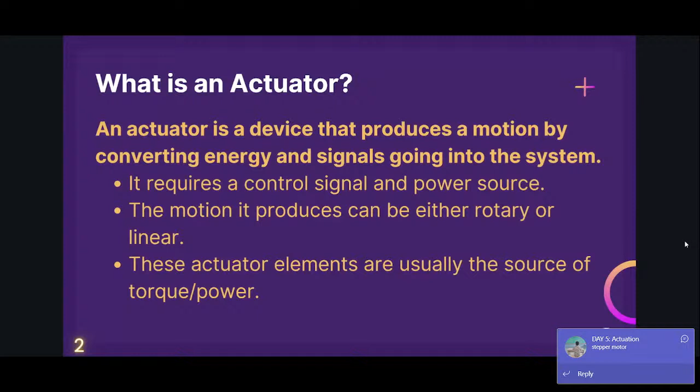Yes, motors. Motors are like stepper motor. Yeah, stepper motor, servo motor. The motor is a very good example for an actuator. Yes, exactly. So it requires a control signal and a power source. The motion that an actuator produces can either be rotary or linear motion. So we'll learn this as we learn about the types of actuators. And these actuator elements are usually the source of torque or power.

Okay. So actuators that you find in daily life. So what can it be? Okay. So if you have traveled in public buses, there is an actuator there. You'll find that there is a motor linked to the door of the bus for closing and opening, right? So that motor has a rod connected to it, to one side of the door of the bus.

So that actuation there is a good example for linear actuator. It opens the door, it closes the door with a linear motion. So that's basically a good introduction to actuator. So can we go to the next slide, please?

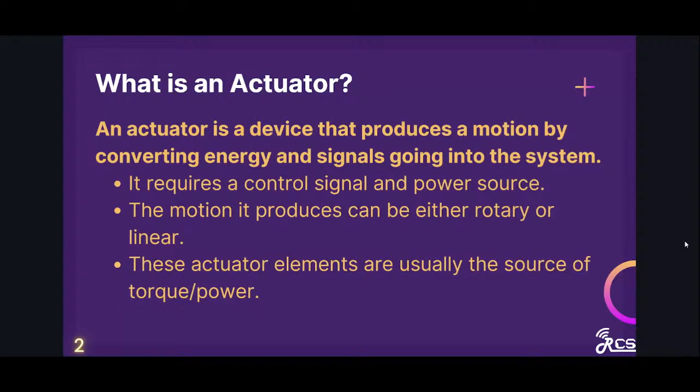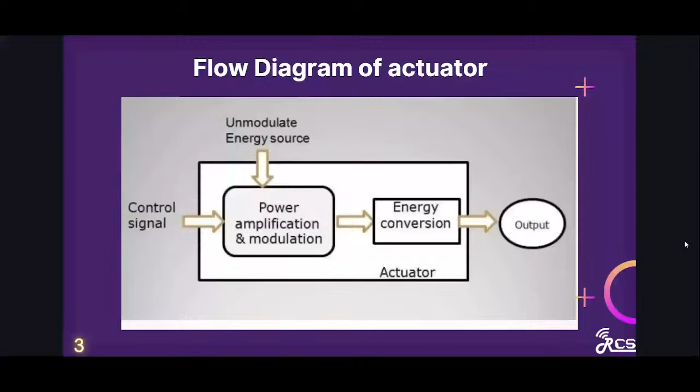That's correct. So the other category on which you would decide an actuator is based on the output, whether you want the output to be in a linear mechanical motion or do you want it to be in a rotatory motion. So yeah, that's what we're going to see in the next slide.

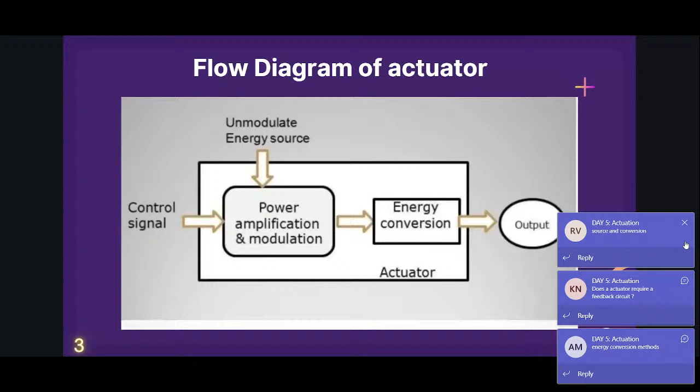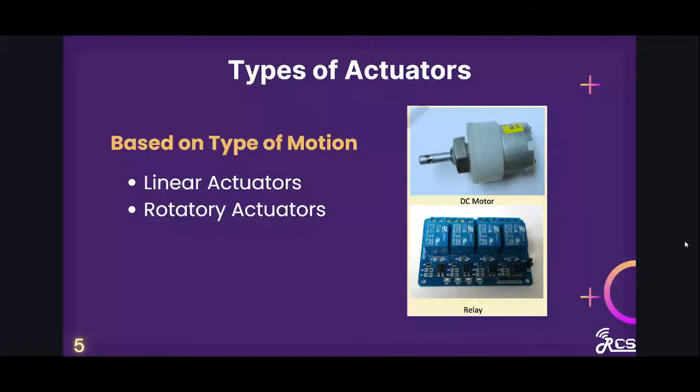Next, we have based on the type of motion. That is, whether we want the actuator to give a linear motion or do we want the output motion to be rotatory in nature. So now that you have seen what all types there can be, let's go right into our first type, which is pneumatic actuators. So pneumatic actuators are devices that convert the energy of compressed air or gas into mechanical motion.

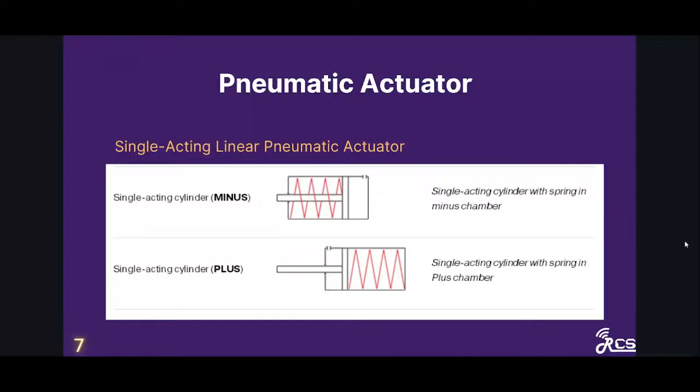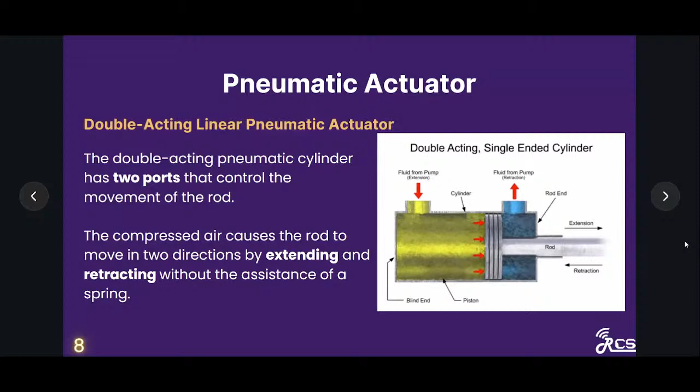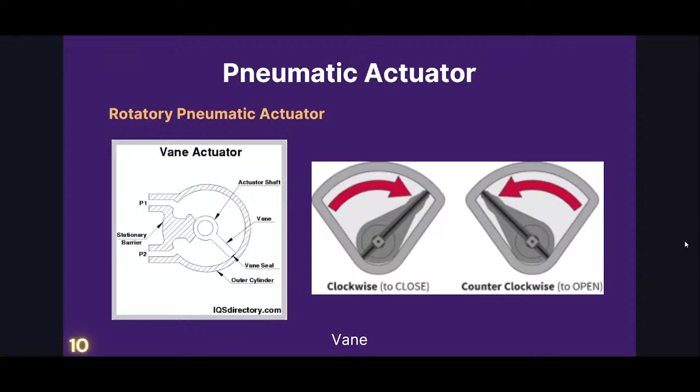Any doubts before we move on to the next topic? Yeah, Avantika, in vane you can move it both ways. If the pressure in P1 is more than P2, it moves clockwise. And if the pressure in P2 is more than P1, it moves counterclockwise. So in both mechanisms, you can move it clockwise or counterclockwise. Okay, so if you don't have any doubts, let's move on to the next topic.

Hydraulic actuators. Hydraulic actuators are very similar to pneumatic actuators. The only difference is that in hydraulic actuators, you have a liquid present. That liquid can be water. It can be any chemically synthesized liquid based on how much PSI you want to work it under. Whereas in pneumatic, you'll be using compressed air.

So yeah, in this also you have the same types: single acting, double acting, rotatory, everything is similar. The only difference will be that you have a liquid present and not a gas present in that chamber. But wait, before I start semi-rotatory actuators, if all the mechanisms in hydraulic actuators and pneumatic actuators are the same, that is, we have the same rack and pinion, same vane, and same single acting and double acting, why would we choose hydraulic over pneumatic, or pneumatic over hydraulic? What advantages do you think both of them have?

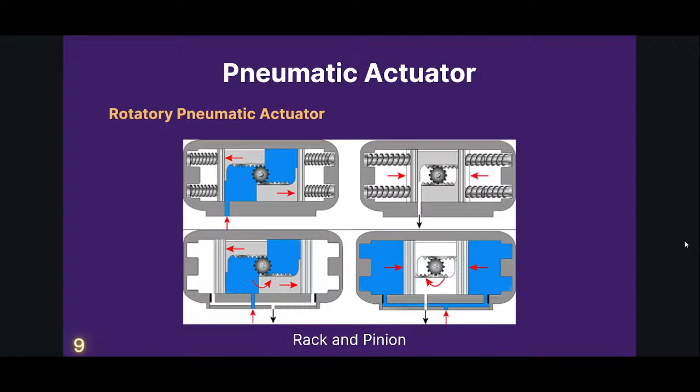If you look at the characteristics of pneumatic actuators, which I told you at the start of the concept, these three characteristics, you can get a clue of why we would choose one over the other. Any clues? Okay, yeah, definitely there is minimal leakage in pneumatic actuators because gases tend to leak much less than liquids. So that's their minimal leakage. Power will be more in hydraulic. Yeah, that's true. Why do you think the power will be more?

Actually, I won't say the power output would be more, but the power which you get for a certain energy input. That is, let's say you send 50 meter cube of liquid over here, and you send 50 meter cube of air over here; for the same input amount you will have a different power output. But yeah, that is true. Power will be more for the same input. But why do you think that is so?

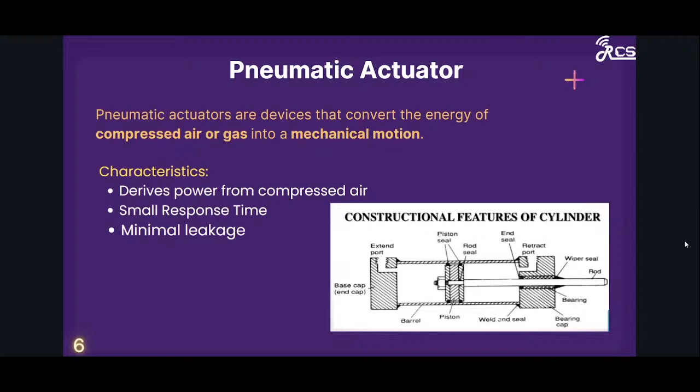Any clues? That point over there, that power will be more in hydraulic, is the main reason why we use hydraulic over pneumatic in certain situations. But why do you think it will be so? Any guesses? Okay, I'll tell you why. So, in hydraulic actuators, whatever liquid you send, it's less compressible than whatever gas you send, because gases are always more compressible than liquids. Yeah, due to incompressibility. Yeah, that's true.

So suppose you send certain energy for air and certain energy for liquid. What will happen in the case of pneumatic actuators is that a certain amount of energy will be spent to compress the gas inside. Whereas in hydraulic, it's not that compressible for normal use; at high pressure it's definitely compressible, but for the normal pressures we use in industries, it's not. So for the same energy you'll get more power there.

Hydraulic could sustain the power provided for a long time. Yeah, that is also true, because suppose you send a constant amount of pressure for a long time, that energy will compress the gas after a certain time. So let's say you have the limbs of a robot, a bipedal robot, and you control the limbs using hydraulic actuators. Let's say you want to pick something, and you want your arms to be at that position for a certain amount of time.

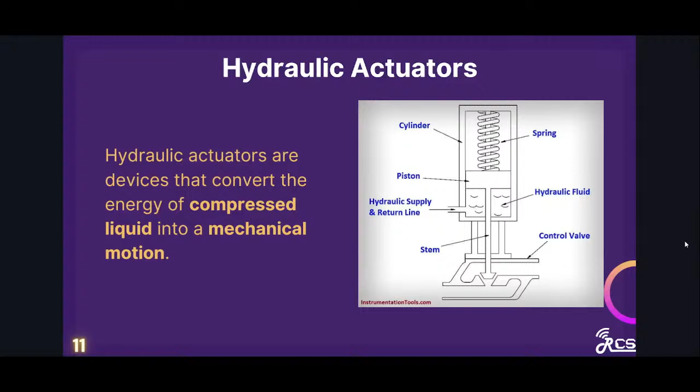You don't want your arms to constantly be moving around. So when you want to make it go and stay at one position, if you take a hydraulic actuator, you send a certain amount of liquid, that's fine. But if you take a pneumatic actuator, there's a very small chance that some gas is compressed, and because of that the arm might move. So if you want your output to be stable, that is you want your arm or the load connected to be stable, you will always use hydraulic actuators. That is one of the major reasons why people take hydraulic actuators.

If it's a light load that you want to move, or in certain cases you want to constantly switch it on and off, then you will take pneumatic. Because a pneumatic, even though it can't support high load, is much more cost efficient as the leakage is minimal. And even if gas leaks, neutralizing that is very easy. Whereas if some chemically synthesized liquid leaks, the cleaning and maintenance of that will be much costlier.

So while hydraulic is much more cost ineffective, it still has its advantage that it can give higher power for the same energy, and it can also give a stable output. That's why you use it in hydraulic jacks and hydraulic brakes. If your car ever gets punctured, you need to lift your car using a jack, right? In that jack, you want your car to be lifted at a stable position. You don't want that jack to be constantly moving. So in that case, you use a hydraulic actuator.

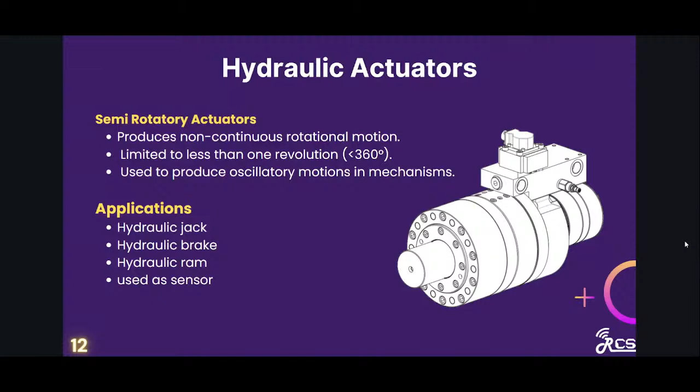And similarly in a brake, pneumatic actuators can't take that much load. If you want to stop a whole car, you need to remove that full momentum. So that whole momentum gets transferred onto the brake. A pneumatic actuator can't take that much load. So that's all there is about hydraulic and pneumatic actuators. Does anyone have any doubts? No doubts? Okay.

Okay, then we'll move on with electrical actuators. Whose doubt was it? Krishna Narayanan. What was his doubt a long way back? Does an actuator require a feedback circuit? We'll answer that question soon. So in electrical actuators... wait, just one minute, sorry to interrupt. Venkatramanan J has asked a doubt.

For the spring to extend, do we suck the fluid out? Yes, in that case we always need to suck the fluid out, because for the spring to extend, the force provided by the spring needs to be greater than the liquid pressure present. And if you don't suck the fluid out, you can't reduce that. So you always need to suck the fluid out if you want the spring to extend. But even when you suck the fluid out, it will still be in one chamber. You don't use two chambers for that. That's why it's called single-sided.

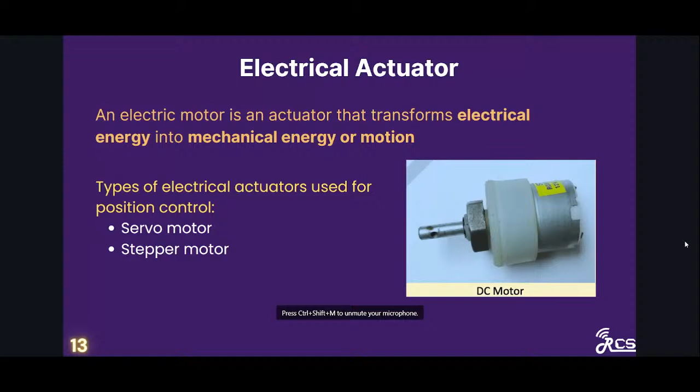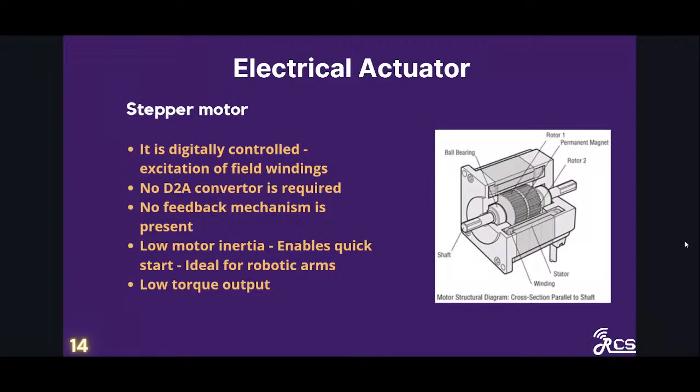So going to servo motor. Can we go to the next slide? Yeah, so if you see in servo motor, you can find a small image of how a servo motor works. So you have a gearbox which can give out high torque with the gear ratio present. You have a DC motor that rotates at high speed. You have a potentiometer, something that you studied in the sensors class, right?

Can you recall what was a potentiometer? Can anyone tell me why we use a potentiometer here? Any guesses? Variable. Okay, variable resistance is the application of potentiometer, but... to work on exact voltage. Okay, still more precise. I already told you the exact word when I was explaining stepper motor. Exact voltage. Think again. Measure voltage difference. Okay. Anything else? To work on exact voltage, we work on exact voltage to what?

Okay, stepwise rotation. When we give single excitation to... okay, yeah. So Gautam is explaining it in words. So we'll go to next slide. I'll also show what Gautam is explaining as a small image after we see this servo motor working diagram.

So we feed the desired input to the servo controller. The desired input is the angle to which we need to actuate. That input is fed into the servo controller, which then sends signal to the drive amplifier. Drive amplifier sends required voltage for the DC motor so that the gears start rotating. And that in turn gives an armature current, which again drives the drive amplifier. That's how the drive amplifier works.

So now for this DC motor, to find how much it has rotated, we use an encoder. That's basically what Tarun explained in the sensor session. So we find how much we rotated, get that output as an input and feed it to the servo controller. And this is called feedback mechanism.

We get the output, feed back the input, compare the difference, and again actuate it. So that's the main work of the encoder. It gets the current position and speed of the DC motor and sends it to the servo controller. Now again, the servo controller sends the signal to the drive amplifier based on the difference obtained. So there will be a difference.

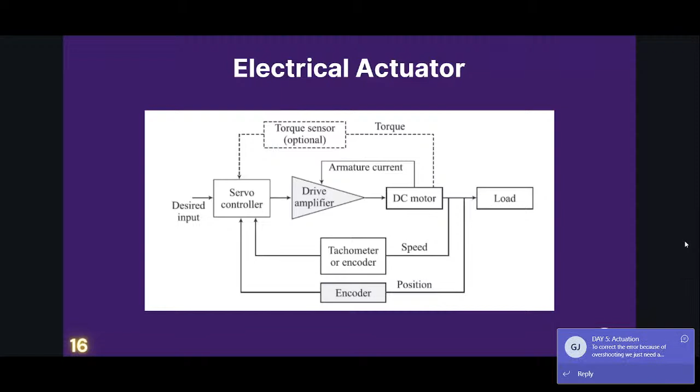Yeah, so the image that I shared there is what a typical two-phase stepper motor looks like. So what you see there are internal windings and external windings. What Gautam mentioned there as excitation is where you give the current to the field windings present there, which will in turn create a magnetic field, which produces a magnetic flux, which rotates the rotor present in it.

So you have two components, a stator and a rotor. Stator is something that is attached to the outside layer of the stepper motor, which doesn't rotate, as the meaning gives you. And rotor is one which rotates, causing a rotary motion. So yeah, that's what Gautam told about stepwise rotation.

So yeah, anything else? Any doubts? Any more doubts? So is everyone clear? Varun, next slide.